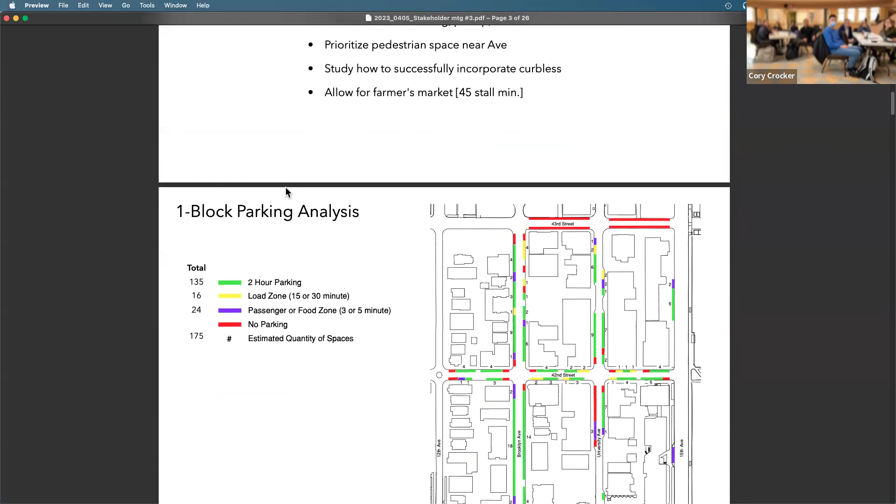We have two approaches: one we call market, and one meander. The meander one is named after the way the street moves through—it's not going straight through, it wiggles a little, it's meandering. The market concept we named because it would allow a market; it's a more typical linear street pattern that allows for that condition you see on Brooklyn at the farm, or further up on the Ave, where you're walking straight down the street with stalls on both sides. It allows for more of that typical farmer's market condition when in event mode on that street.

Now I'll go through each concept relatively quickly, looking at each block so we can see some detail. This is the market concept. We have raised intersections at the two street intersections with a different pattern of concrete, maybe stamped, maybe colored—we're showing a colored option here. There are options, but the idea is to differentiate these intersections and the alley crossing. We're showing a concrete finish with special scoring on the sidewalks, and a lighter color concrete on the street to differentiate the primary people space from the car space.

We're showing new trees in tree grates, so there's no vegetation right around them—soil underneath the paving allows for roots and water, but there's a lot of hardscape space for people to move around. One thing to point out in this option: right along the edge of this curbless area, we're showing bollards, about 6-inch diameter, maybe metal or concrete posts, holding the separation between the pedestrian safe space and the street space even though there's no curb there. The bollards allow flexibility in that people space just inside—furnishings, picnic tables, cafes for restaurants, public seating. We're showing pedestrian light poles as these circle dots running down the street on both sides, in line with the trees.

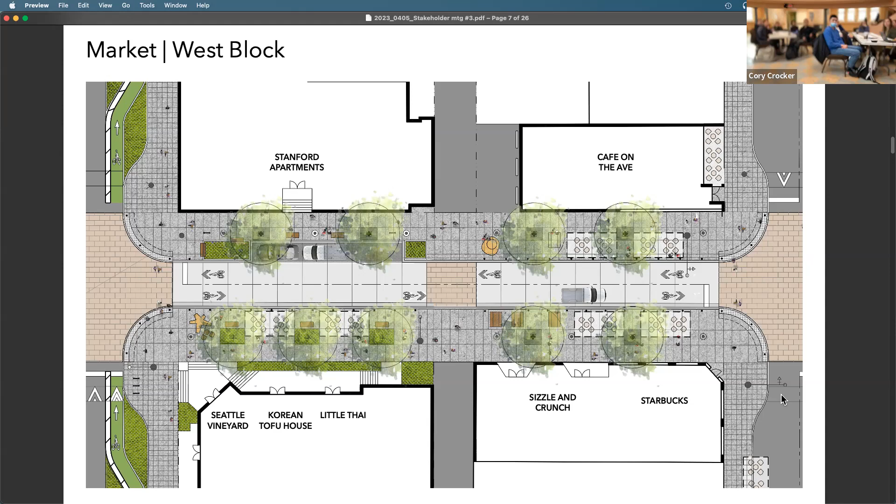Thank you for that. So right now I'm going to go over the big one. We're continuing now. 15th is on the right over here, and it's again a similar kind of feel. We have our 20-foot wide pedestrian space on both sides of the street, with the bollards separating, holding that space. We have some parking here and here, and then we have different furnishings depending on how much space we have with when there's parking or not.

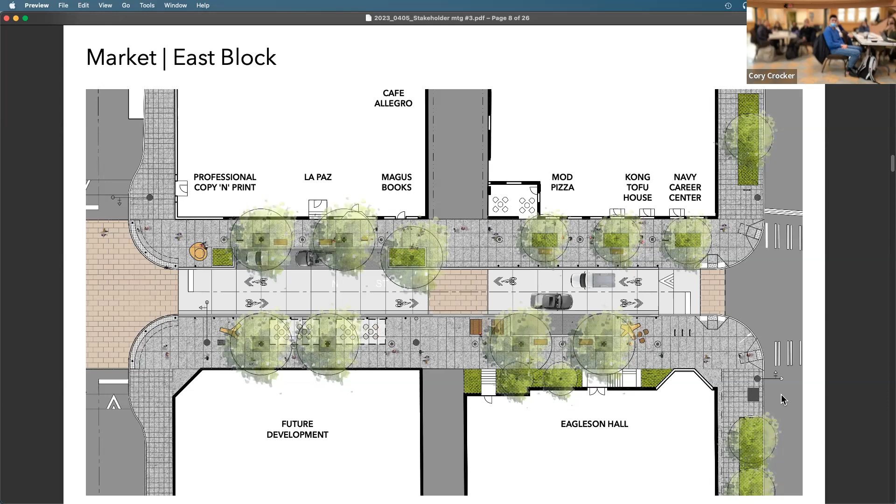All right, now we're going to look at the meander concept in a little closer detail. So in here, we have our road, our main vehicular is meandering across. It changes at the alley there. We have some parking at the wide pedestrian zones. And so what you have with the meander concept is you have changing pedestrian space on both sides as you move across. So here we have about a 30-foot wide area that can be pedestrian.

It can also incorporate parking. And over here, it's closer to 12 feet on the narrow side. And that flip-flops when you get over here, where we have that 12 feet and then that 30 feet on the north end. Kevin, so the 12 feet is what exists today.

Yeah, building face or property line curb face. So this line right here is the existing curb. We would remove the curb and replace it with a curbless condition, but that's existing width that we can imagine. And we've given all that extra space to the north side right there, or to the south side right here.

How does the drainage work on this version? Let's get into that more later. Thank you, this is important.

One second thought too, is that even though we do have that wide space, which is nice, in front of the Stanford, we'll have to contain all of the structures that activate an outdoor activity to the sidewalk areas or that parking strip, meaning we'll still have to maintain the fire lane. So you can have people walking in the fire lane, but without a lot of extra planning, you won't be able to have tents there.

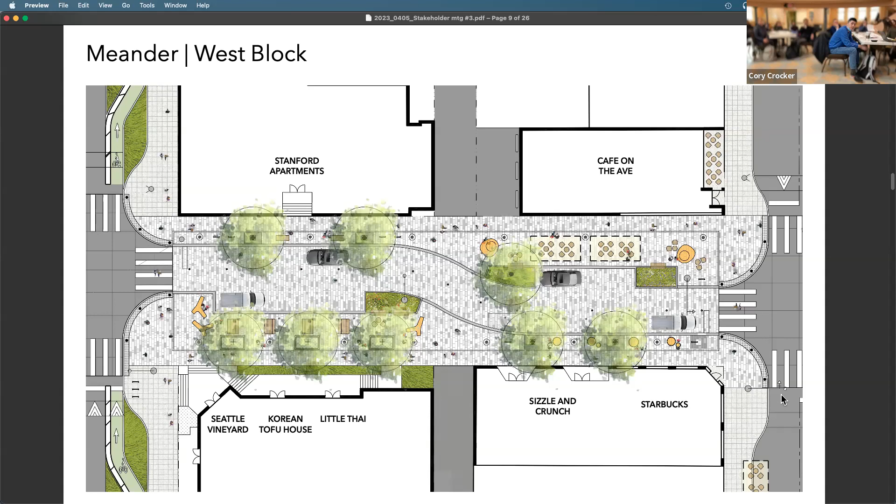Okay, this is looking on the other side. So that meander has mirrored. We start off on the bottom and we come back up to the north. So it's a very similar configuration, we've just mirrored it to this side of the street.

All right, now I'm going to go to some diagrams that talk to some of these questions that we've had in a little bit more detail. I'm gonna bring up the topics right here, and the main goal of today is that our small groups discuss basically the questions that these diagrams are bringing up, so that we come to some understanding of what are people's thoughts, what are people's preferences relating to these topics.

I think that one of the other things too, temporally, those could change. Yeah, so the idea of the evening is they could be parking spaces for parking vehicles. So we'll talk more about this in your small groups.

One thing to note, on that concept, is that there is flexibility of where those parking stalls are going. They could flip flop across the street. In this one, they need to be where they are, in the sense that they are at those wide zones of the pedestrian space.

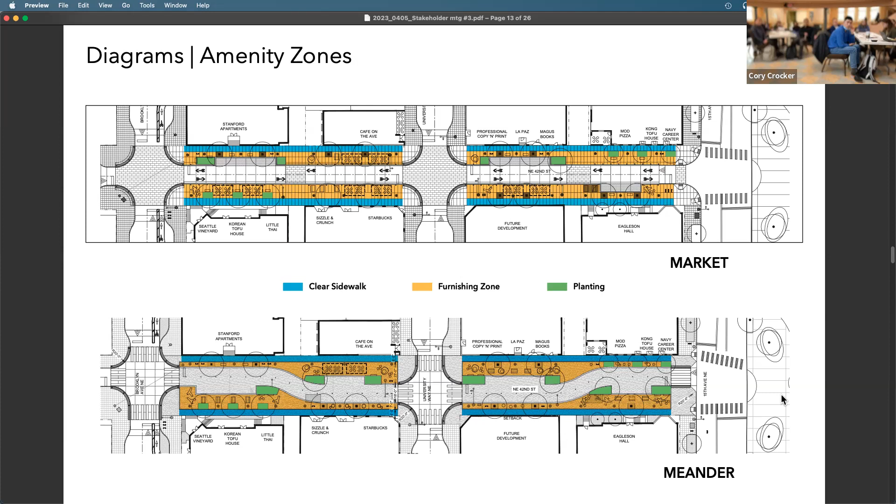You've not probably said this, but are they both curbless? They're both curbless, yeah, both curbless concepts. One thing that came up in the meeting with SDOT was that because this is a non-arterial street, jaywalking is allowed, so I think surfacing that is ambiguous between sidewalk and street is okay. It is, yeah, definitely okay. And we have safety in terms of accessibility, having that edge being very clear for pedestrians walking across, and also for vehicles, the edge being held by fixed elements that are raised above the ground.

One point of this meander that I didn't mention before is that part of the meander also helps slow cars down a little bit more. Cars are completely welcome through, two ways, but because when you're driving through you don't see all the way down the block and you have to make this little turn partway through, cars are going to be going slower in that concept, and pedestrians will have a little bit more safety.

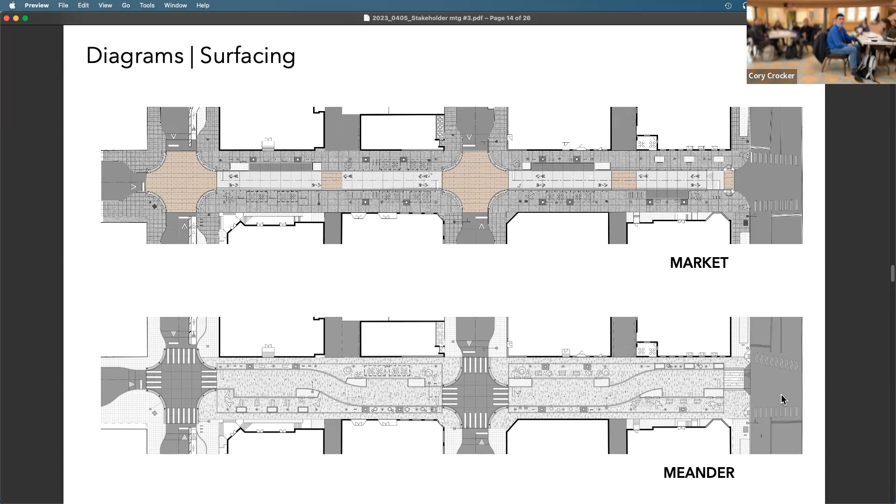The top one is very similar to a street fair, but a common complaint about street fairs is that you put your back to all the businesses. So the bottom one, by having people move around and circulate, also animates the facades for window shopping. That might be something to consider.

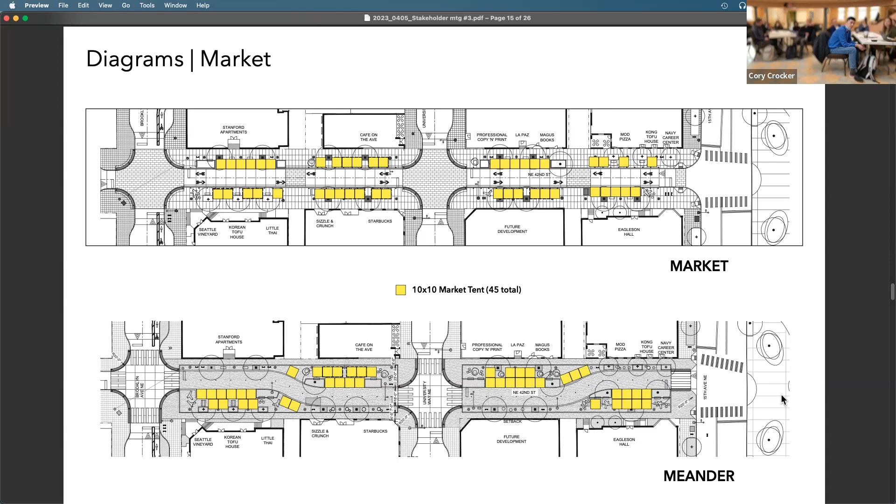Good points. But part of the discussion is going to be part of the choice about meander. There are lots of distinctions between meander and the straight concept, but this is one of the important ones: how would it work in an event space, and how would it work with the market?

So these are some of the topics we want to be discussing in our small groups. I'm going to read them in a moment. I'm also going to go through some precedent examples, and we're going to be thinking about these topics in those precedent examples, and then I'm going to release us to our groups.

So the topics for today are meander versus straight. It's one of the big things we want to talk about today. How does your group feel about that? You might like both concepts, so what do you see as being different there?

Just a really quick clarifying question: is the only version of meander the most extreme one you've shown, or can you meander less? You could meander less, I don't know—if your group comes up with a reason why that would make sense, talk about that.

We're showing the larger meander to really get the full meander effect. The full meander effect is also to maximize islands. As you start to water that down, you're not quite getting enough on one side or certainly the other, so it becomes a little more challenging for managing the market.

Yeah, it would be hard to put those stalls in if we did partial.

Talking about loading, delivery, pickup, and parking—we can talk about day versus night. We've already talked about how in the evening there could be more parking. But looking at how these diagrams show where the parking is and what it's assigned to, and any refinements on that: are there any businesses that aren't getting their needs met with either of these layouts? Are there changes or tweaks we could do to make that work better?

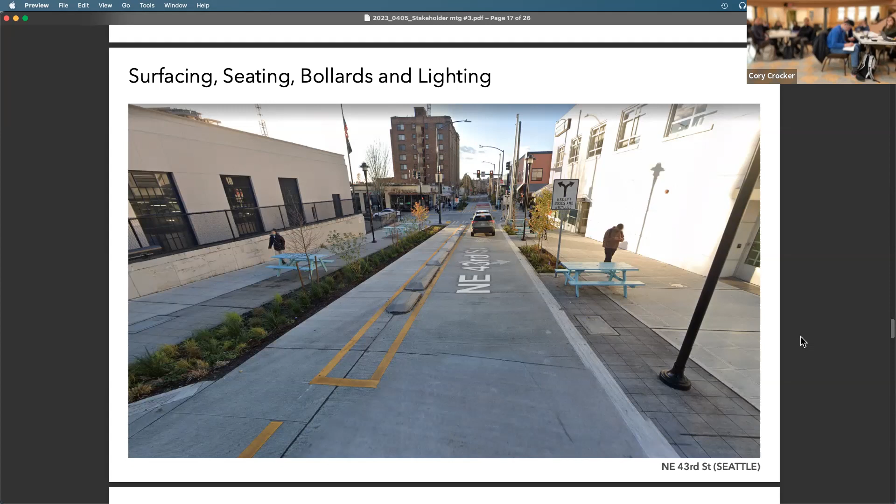This is over in Seattle. So this is a condition showing bollards. These bollards are probably closer spaced than what we would do, I'm imagining. But you can see what that can feel like where the bollards are holding the space. It means you can do a lot of options with the pedestrian space and the furnishings on the backside.

Here on this street, most of the seating is up closer to the building frontages. In our street, we're a little wider, so we could have a mix of that—being closer to the building frontage versus further away. But you're also seeing the pedestrian light poles going down, and the singular paving material going across the entire space, which really changes the feel. It makes it feel like one plaza, even though cars are definitely coming down here, and there's parking throughout.

You don't see the parking. Well, yeah, the parking is actually right there. There's just no cars in it, so you can't see it when there's no cars in it because it's the same material. To be clear, this is one way.

Right, and it meanders. It's a 60-foot wide corridor, which is almost exactly what we have. It's one lane—this is one lane. So it's angled parking that allows for that condition.

And how wide is that lane, do you know? That lane, I think it's more like 18 feet. Okay, a little bit less, so it's similar to what we have. Does the street actually curve, or is it a curved parallel building facade? Buildings are parallel. It doesn't curve.

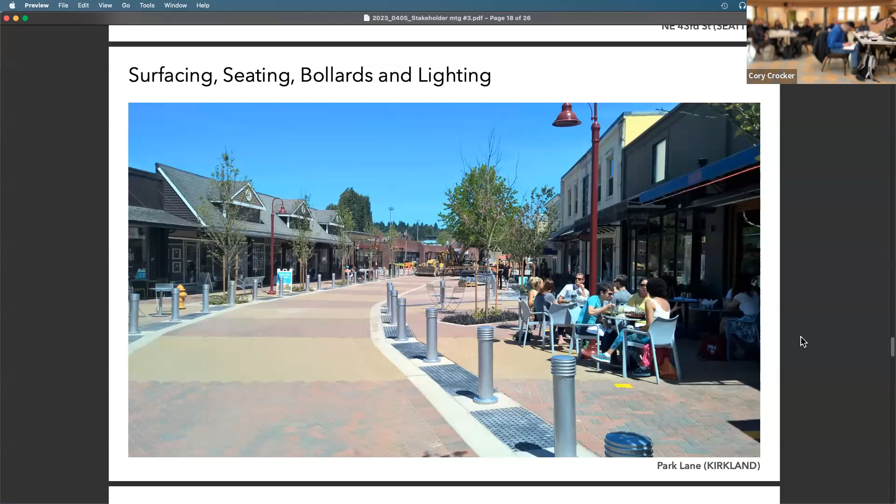Here's another picture of that one. I brought this one in because it's showing some of that parking right here. It's also showing how people are utilizing the space. This is also a different time of year—it looks a little more activated with the plants right now, with the leaves going on.

But you can see parking here, you can see parking there. So that meander really closes off that view all the way down for cars driving, so cars will go much slower on the street. This is one way—it's a little narrower than ours would be, but there's some similarities there. But people feel comfortable walking in the streets. Yeah.

Those two. This other picture has a lot more people in it, but then you couldn't see the elements, so I didn't use those.

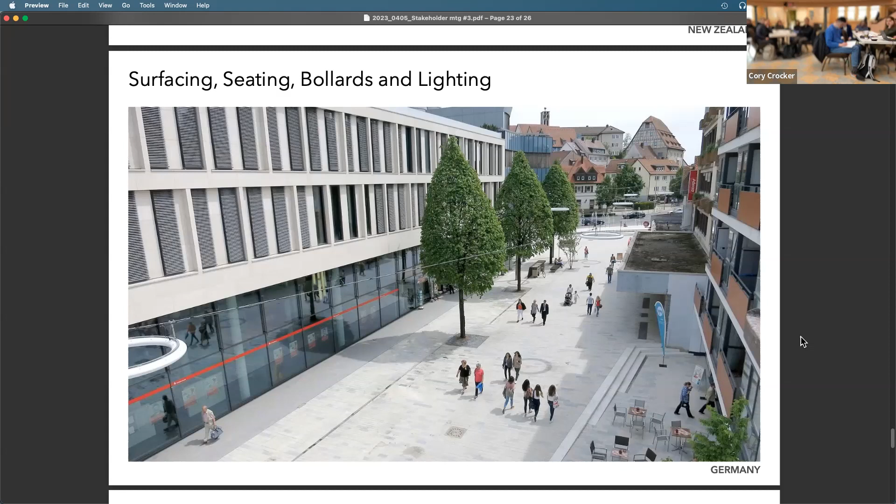And here we are — this is in Germany. This one has common materiality across the street with a very clear separation. We have elements going straight down on either side, creating a distinction between the middle of the street versus the two sides. So all our furnishings and fixed elements are in these amenity zones. You have clear pedestrian sidewalks by the building frontages, and then the space in the middle that could be closed down for events but could also have more cars in it.

So those are at your table, meant to give some pictures of what these could be. Our concepts are different from any of those, but they share some of those elements, and some of the things in there are what's up for discussion. We saw a lot of consistent materiality across, and we also saw ones with clear distinctions on materiality — so what do we prefer for this street? We also saw bollards holding that space versus furnishings holding the edge of that curbless space.

We saw some lighting — there was one with catenary lighting going across the street, but most had pedestrian light poles, and some bollards also had lighting in them. So I'm going to leave this up on the screen while we break into small groups to discuss these topics and how they relate to the two concepts, what we like about them, whether we want any changes, whether we'd prefer to see the paving from one concept on the other, and the different vehicular stalls and how that's working. We'll go through these different topics.

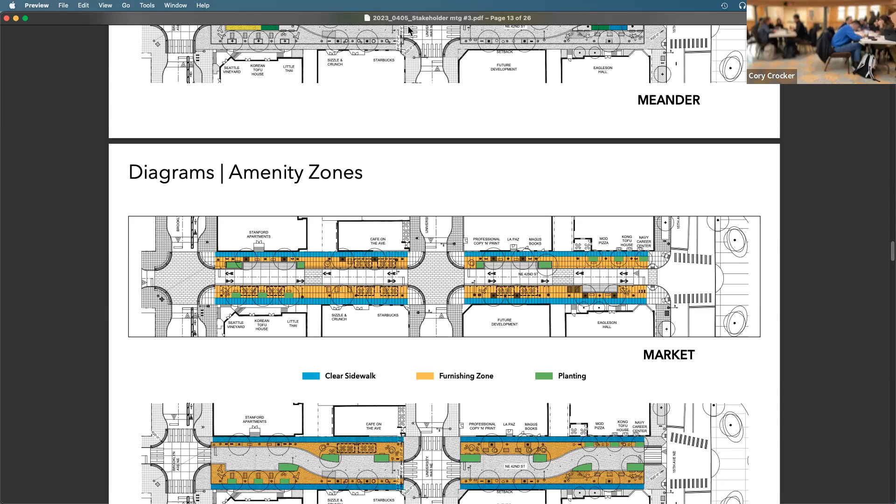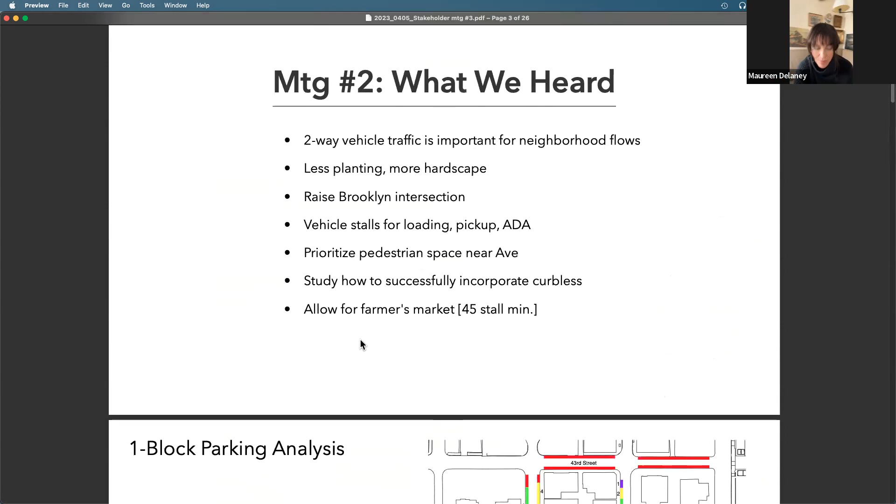I'm fine with it on the screen at the moment, I think. Yes, okay, let me go back to that. I'm fine with it on this screen as well. That sounds great, thank you. I'll turn that on.

But could you leave the screen on showing one of the two diagrams? Do you remember where that is? It was up above, right there. There you go.

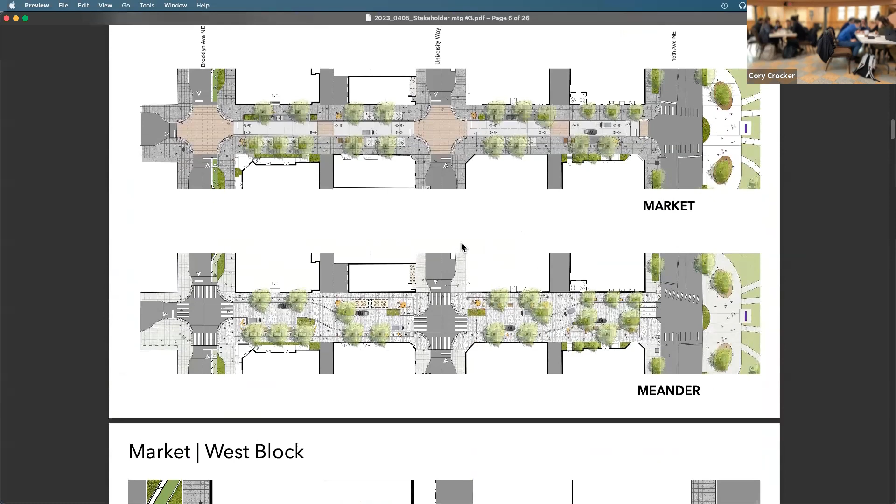I think last time when we were at the table together, we initially had 13 spaces, and then if we kept it above 8, that would be okay. But if you feel differently, we should identify a number of spaces you think we should have.

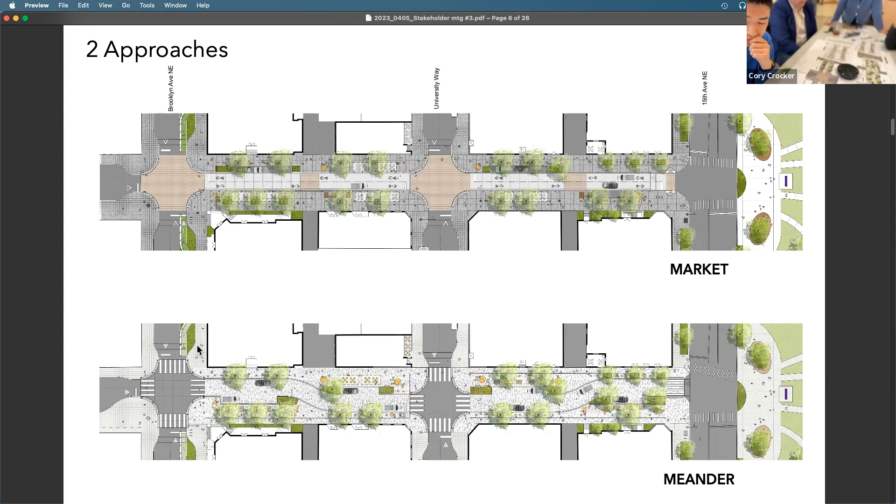I love the material, don't get me wrong, but I feel like this feels more suburban. The material we could still bring over, that's absolutely a possibility. But I feel like that just feels suburban. Like I like the examples they had from Auckland, where it just felt straighter, and they used some of the furniture to delineate, but it felt like one big living room.

I think the big thing that the city wanted was the meander, because it makes it safer - cars are indicated. So is there any other way that we can indicate to cars that you're in a shared space and you're a guest? I think the visual cohesion of the pavers will do that.

From sidewalk, that's what I was thinking. I was gonna say the other advantage that I like of the straight one is also the places where there's potential for seating.

Kind of matches up more with the businesses and so on. And I agree, I like the idea of not having - because of the way the meander works, you end up with cars parked next to where the seating is, which I just think the straight one might be a nicer experience.

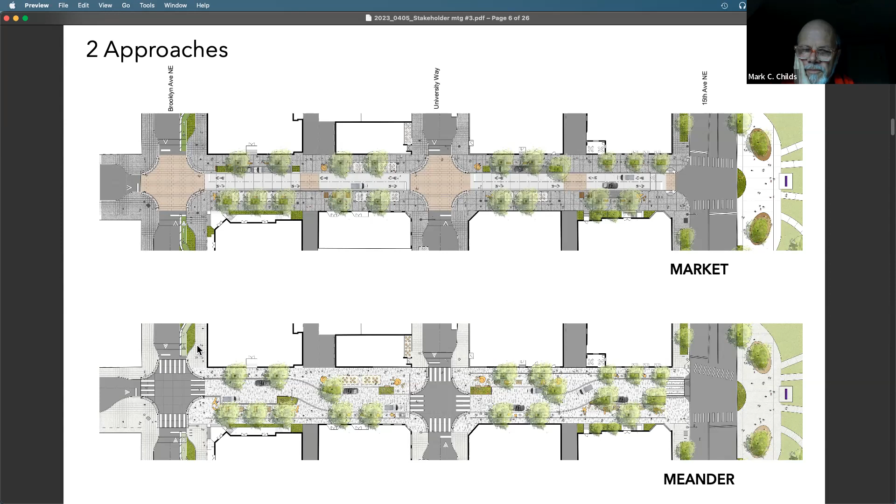Is the paver a possibility for getting an artist involved? Yeah, that's what I was thinking. Once we've decided on the paver, can we come up with a cool design — maybe five iterations of a cool paver?

Joshua is the lead of the 1% for art for SDOT. So he's sitting at a table so we can talk to him about what's possible.

Maybe there's a shape that could be unique to this neighborhood that we could buy a lot of, and it's not super complicated, and replace it, like an octagon. It fits together well, but it doesn't have to be that. A mold could be a mold that you can reuse too.

How likely are we able to use recycled materials for pavers? I think the city would consider that, yeah, as long as they're durable.

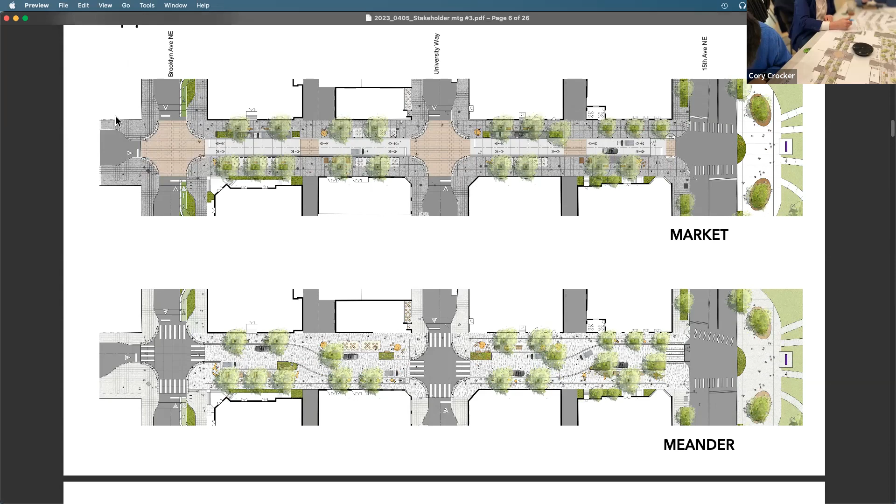Have we covered all the topics? Let's scroll back to the topics list. One thing I want to call out really fast: are we aligned that maybe less plantings, especially closer to the Ave, because they become trash receptacles? You'd have less space, but less plants near the edge. This seems like a mess. I mean, trees are important, but big open pits of plants that no one's going to manage seems like a problem.

We do have Maureen on the call, and we have Maya here. So you guys both represent businesses on the Ave or places.

Looking at loading, delivery, pickup, and parking, do you guys have any special concerns or questions? I'm sorry, the audio is really mixed. Were you asking me? We'll try to have one conversation at a time, but Maureen, since you joined us, and Maya's here, you guys both have entities on the street.

We're talking about parking and loading, and at the last meeting I think we all came to an agreement that we want loading for businesses first, and short-term parking for pickups and drop-offs for food deliveries. Then we want ADA above all that, and short-term parking, just enough time to pick up or drop off for regular people. At night, maybe it changes into 2-hour parking where you can enjoy dinner. So we are thinking about parking and loading. Are you guys okay with the way the parking is going, or do you have any input?

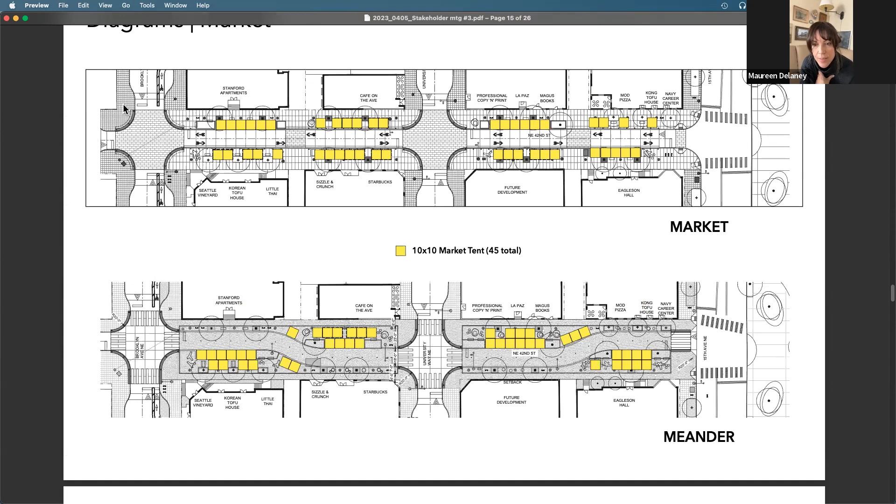I'm not sure I can fully see clearly what you have. I'm a stakeholder at the Stanford apartment, the building across from the Seattle Vineyard. So loading for my tenants is critical, for moving into the building obviously.

So that would be my main concern. On the designs on the screen, one has loading right in front of your building, the other has it directly across the street, but we made sure there was parking there for that specific need. The La Paz building is also residential, so we wanted to make sure there was parking there. Do you think the way it's rendered is good? I just want to make sure we covered our bases. We can say, yep, go for it.

So two parking spaces, is that what I'm seeing in front of our building? I think there's going to be 3 in front of your building: 2 loading/delivery, and 1 food pickup. These would be short term, so they'd park for half an hour, or if they get a permit for a moving truck, they can be there long enough to move in.

Oh, but there's not a loading zone directly in front of us. There is, on the straight version of the street. And on the meander, it's a loading zone just across the street. Again, it's a pedestrian street where jaywalking is fine.

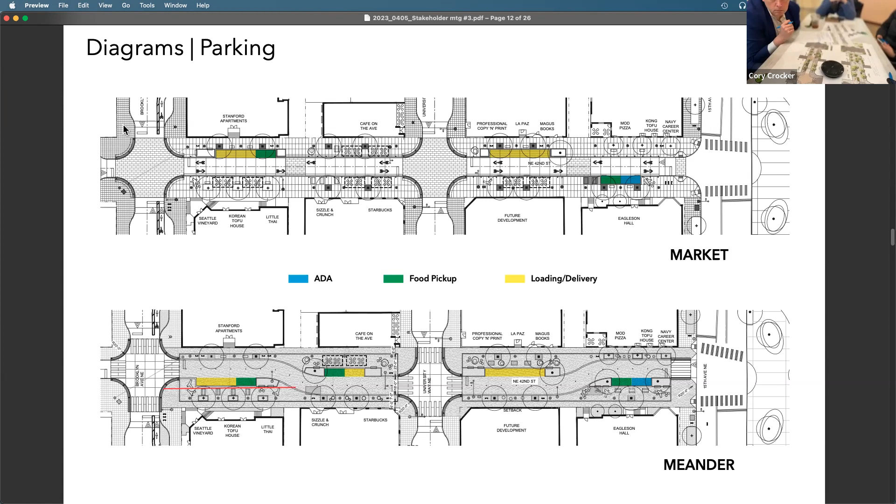Do you guys mind if I annotate on this? There was some discussion about a more subtle meander, and I had an idea. If we cut off this and flip it, and put parking on the other side, same here, cut this off and put parking on the other side, you have a much more subtle meander.

So the curb line is like this, moving a little this way. We're looking at the drawing, and then you move the parking onto the opposite side of the street, so the parking would be on the north side. Let me see if I can draw something here.

So the meander would just be like what Mark was talking about, this little glitch. Maybe with trees or plantings we could make it more of a visual friction point for cars to slow down, while still supporting a market.

I heard people didn't like the parking right next to the cafe. So this flips the parking to the opposite side, where there's a narrower pedestrian path, and makes the meander a little more subtle. It's a compromise solution that might work well for both, getting a little bit of each.

How do you guys feel about it, Table, and Mark and Maureen online? Yeah, I think a softer meander should be explored.

But it doesn't feel like much of a meander at all at that point, right? Yeah, but I wonder, from a visual standpoint, if I'm a car turning onto the street, any little kink in the road would be a signifier. Depending on where we place trees, maybe if you see a tree right in front of you, you'd want to slow down.

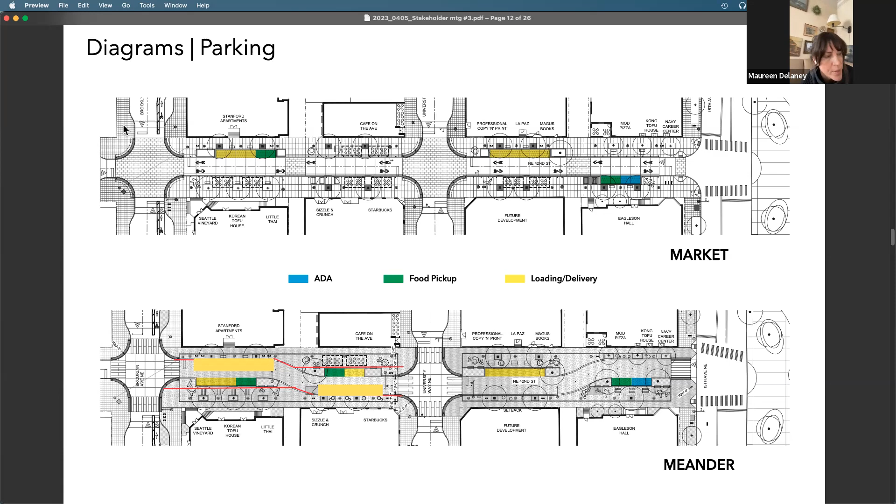I mean, yeah, there would have to be - we have about 25 to 28 apartments switch out annually, so that is something we're already struggling with, and now fearful of losing more. Every other week, that's the nature of this building or the neighborhood really, it's transient due to the UW and the hospital. So that's a big concern for us.

Okay, well that's good then. It sounds like that would work for the Stanford, and we could probably do that for the La Paz too, to some degree, since they're both residential. That's great.

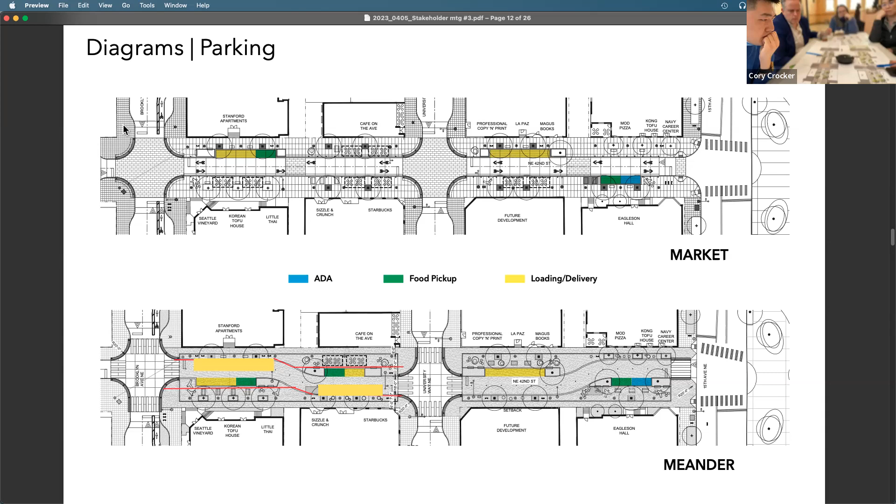So we did the parking. Yeah, I think the parking after 8 o'clock, instead of 2 hours, we should just open it up, like what we have now. Yeah, we could maybe retain one of the loading zones, and ADA always stays. Okay, got it, so we do a temporal, diurnal change.

I have a question - are there going to be trash cans added to this street? There probably would be, yeah. Hopefully, because there's none on 42nd right now, only one nearby. That is obviously a huge concern for this area, especially if we're going to be asking people to hang out and eat. Yep, that's good, so we'll put that on the list.

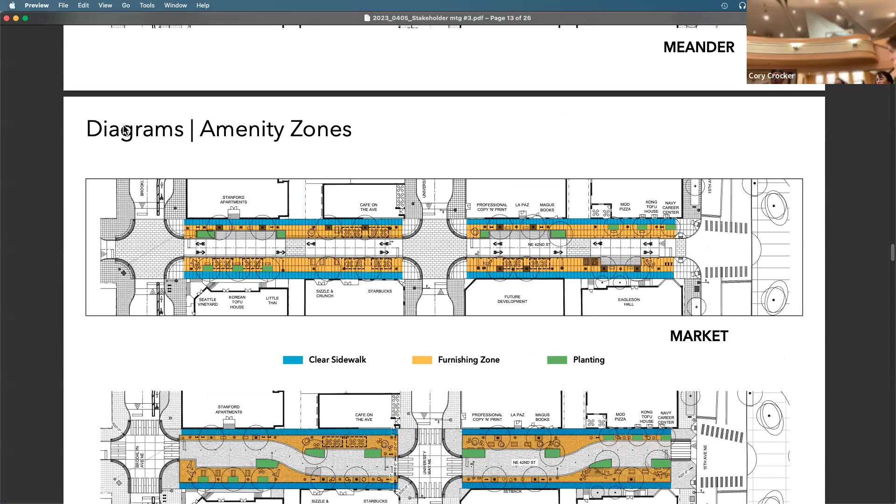And then just at a high level, thinking about the nature, kind of the feeling of the design as a whole, like trying to get away from a suburban feel and maybe kind of embrace the urban. That's why we like the smaller pavers, that I feel a little bit more human scale. Also just like some of the way we address the plantings and the permanent furniture in the street, we just want to think about that.

Lastly, just really forcing the activity towards the center of the Ave, away from some of the apartments that might not want to have all that activity later into the evenings. So finding a real good space on all four corners to have that outdoor seating, whether it's from a restaurant or from a managed area. Is that everything? Anything online? Bethany, Maureen, and Mark?

My only concern is the space right in front of where the alleys are on that street is critical for dumpster pickup. They come every single night, and that's their way of accessing both alleys and their turnaround space, where they lift up every dumpster. They bring them from the alley sometimes to the front, exactly at that little bend where you want to meander. So that's a consideration, as well as for the lights above.

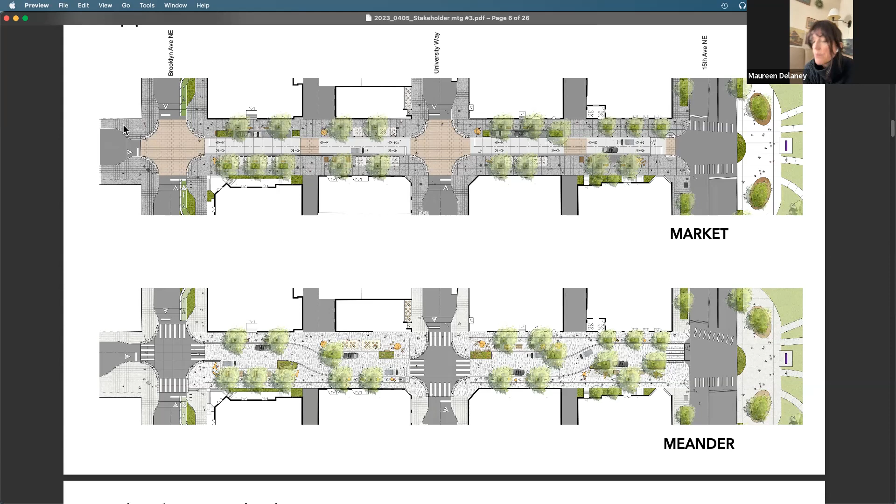Good, thank you. All right, I'll hand it off to Kevin at the middle table. We had a lot of consistency with what you all said, and some differences too, so that's interesting. Can you put the list of topics back up?

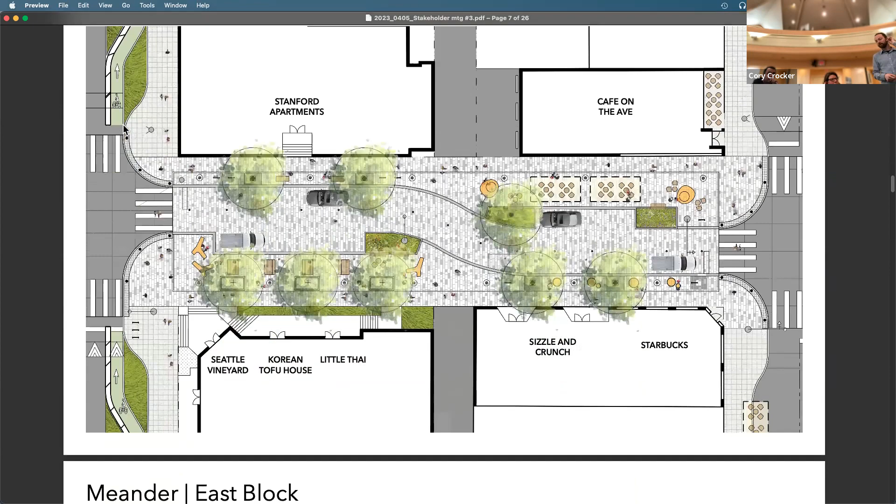As far as straight and meander, there was mixed opinions, but the majority of our group preferred the straight shot, largely because of how it interacted with events. So the straight was preferred. We also thought we should add a few more parking spaces, maybe a couple more total, to bump it up a little bit.

One of the things we talked about was making sure there was parking for technicians and other service people that didn't necessarily fit neatly into that 30-minute load zone to operate for the different businesses here.

In terms of bollards versus eclectic furnishings as the edge, there was an inclination towards the bollard approach, but with some mixing, so it doesn't have to be necessarily as rigid. Especially if we went with consistent paving, there was a strong preference for the bollard approach with that concept.

As far as consistent paving versus distinct paving types, we were completely mixed on that. So we had no agreement in our group on which was better, but there was a lot of interest in both, and typically no super strong opinions that it had to be one or the other. We didn't talk about planting.

For lighting, we like the pedestrian poles, and we'd also prefer to add catenary lighting. We didn't talk exactly about which orientation we prefer, but adding more of that festival lighting approach. We also like that the pedestrian poles could be used to have other event or seasonal elements on them, as part of the neighborhood character. We talked about how the bollards and the light poles should fit with the character of the neighborhood.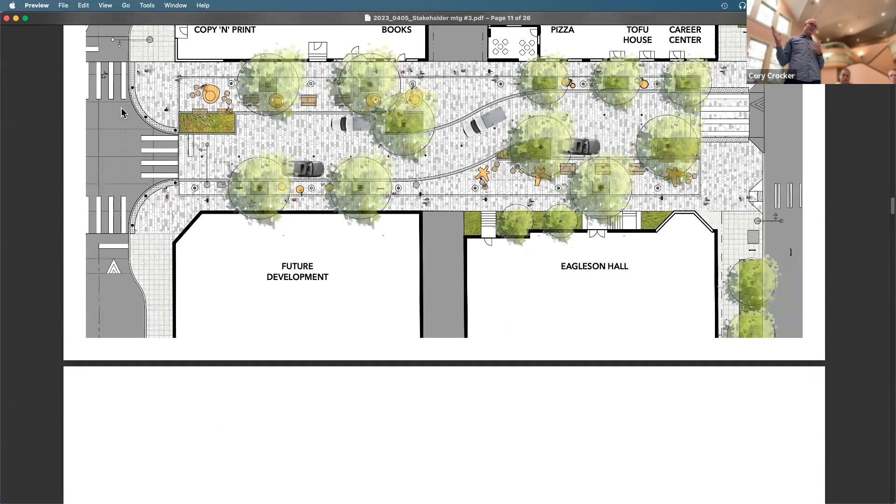If you pull open the meander concept on the east block, there was an idea that, well, with Sunnyside and the restaurants at the north side, at the Navy and Mod Pizza, it'd be nice to have seating there in front of the inactive Eagleson Hall. You could do a straight run through here and only meander on the west side. You don't slow cars down with that, that's the downside. So there was an idea it could possibly be a hybrid of both concepts.

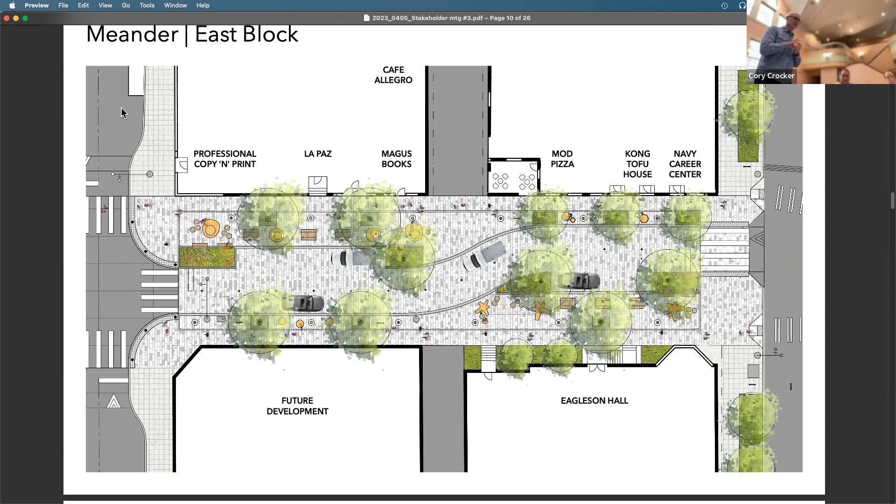That's right, Cory. So, Eagleson Hall is low, so it does allow for good light penetration down in, especially when you bump it out so severely like we do on the meander. But we take a chunk out for parking. So anyway, that was an idea that came up. Thanks, Gordon.

No, go ahead. Thank you.

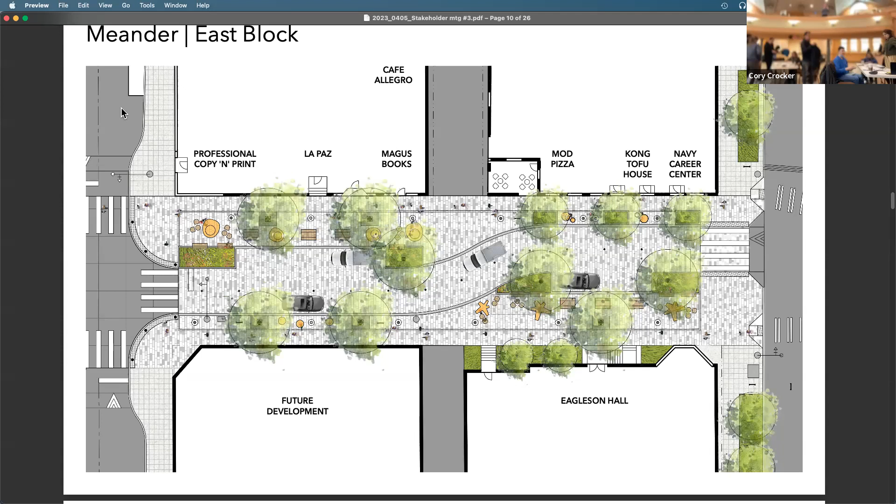Bye-bye. Hi. Okay, you're good. Thank you very much, guys, for joining us online. Sorry you couldn't be here for the sweets, but maybe we'll see you in person. Cory, Bethany, we'll see you on the 19th. Wonderful, thank you. Bye. Thanks, guys.